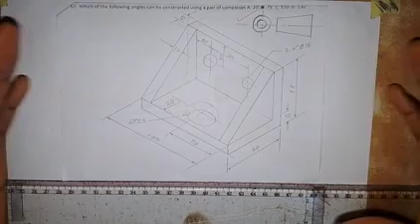Here we are going to draw the orthographic views of this object, as you can see on the screen.

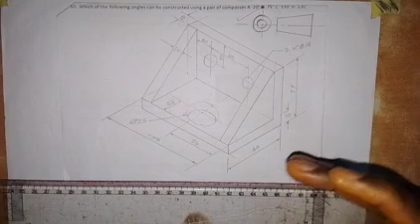The question says that we are just to produce the orthographic views. We are not told in writing whether we should produce the orthographic views in first angle projection or third angle projection, but symbolically we are to produce it in third angle projection because of this symbol that we are given. This is the symbol that we have in the drawing. So this symbol is for the third angle orthographic projection.

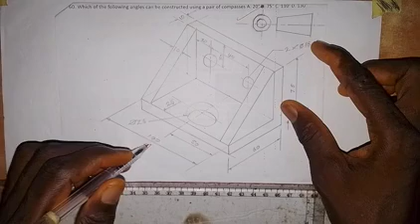When you see a symbol like this on a drawing, when it comes to orthographic views, you have to produce the views in third angle projection. That is what this symbol means. Okay, now for this object, the front elevation is in this direction, so we are looking at it in the direction of arrow X.

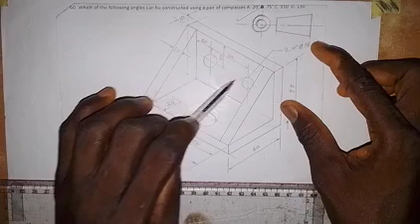So what are we going to see in this direction? We are going to see this rectangle, and within this rectangle we have a hole that is hidden. So let's take note of that. We see this rectangle, then we see this rectangle, then these holes are part of this rectangle here. So those are the things that we are going to put together for the front elevation.

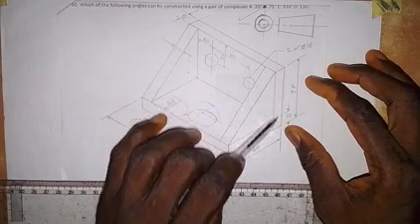For the plan, we are going to see this surface, this rectangle, this rectangle, this rectangle, and then this hole. For the end elevation, we have this shape with this triangle; this will be for the right end elevation. Then we have the same thing repeated on this side for the left end elevation.

But we are going to start with the plan, that is the top view. So we are going to draw this rectangle, this rectangle, this rectangle with this. In third angle projection, the plan is placed up and the front elevation is placed down. The left end elevation is placed on the left side of the front elevation, and the right end elevation on the right side of the front elevation. You are going to see how I'm going to work this out right now.

Let's start with the top view, which we are placing up here. The first thing is to draw a horizontal line. So I have this horizontal line going across the whole page. Then I'm going to come around here and draw a vertical line like this. Okay, then let's look at the dimensions.

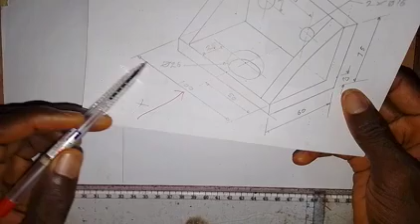The distance from here to here is 100. It applies to this rectangle also. So the length is 100. I will take a measurement of 100 millimeters. So this is 100 millimeters. Then I'm going to draw a vertical line here. So this is it.

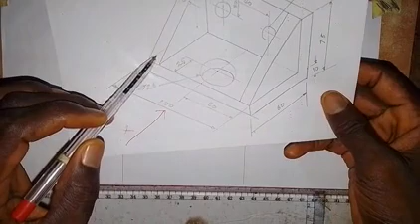Let's start like this. For us to draw this rectangle, the total length from here to here is 60 millimeters. So I will take a measurement of 60 millimeters, and I'm going to draw a horizontal line all through, because of the end elevation that we are going to draw.

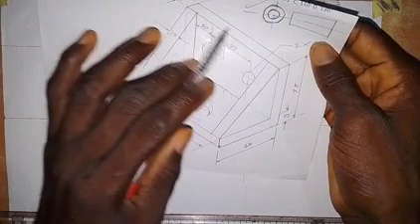Now let's draw this rectangle, the one we are starting with. The thickness is 10, so I'm going to take a measurement of 10 millimeters. Here I will draw a horizontal line across the whole page. So this is it.

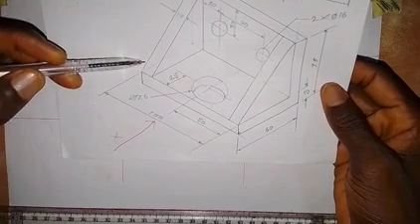We have drawn this rectangle, so we need to draw this rectangle. The thickness of this rectangle is 10. So from here I will take 10 millimeters. We also have another one on this side, so I will take another 10 millimeters. Then here, let me make it a thick line at once.

So that I will not be doing that again. So making this a thick line from here to here, and then I will also draw it as a thick line, so from here to here. So because of the front elevation, I will use my red pen to project this down, and also to take this down. Alright, so we have that.

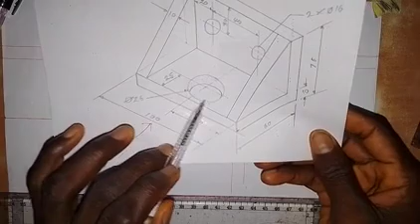So another thing that we are going to have here is this circle, and we are told that for us to get the center of this circle, it is 25 from this edge here. So where is this edge? It is here. So I'm going to take a measurement of 25 millimeters along the vertical. So this is 25 millimeters here. Then I'm going to draw a horizontal center line through the whole page. So it goes to the left side, and I'll also take it to the right side like this. Okay. Alright, so we have it like this.

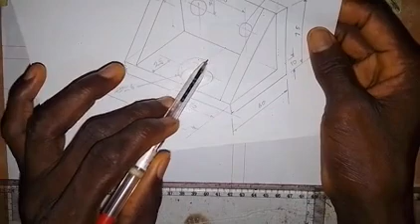So we are told that for us to get this center line, the center line of this circle, the hole, it is 50 millimeters from this end here. So I will take 50 millimeters from this end. So this is 50 millimeters here. So I'm going to draw the vertical center line, because we are still going to use that in the front elevation that we are going to draw down here. Alright, so we have this.

So for the circle, the diameter is 26. That means the radius is 13 millimeters. So I take a measurement of 13 millimeters. So this is 13 millimeters here. So putting the pin point here, then I will draw the circle. So it goes like this. Okay. Alright, so that is the circle.

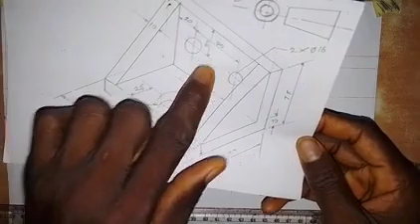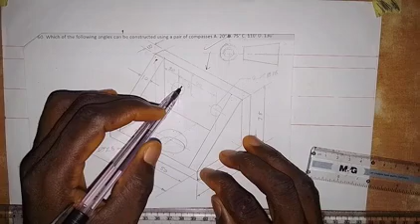So for the plan, what we are left with are these two circles here. We cannot see these two holes when we are looking at the object from the top down. They will be hidden from us on this surface, so they are within this part. So from this end to this center here is 20 millimeters. Same thing applies to this. From here to here is 20 millimeters. So the center lines of the two circles are 40 millimeters apart. And then the diameter of these two circles is 16, which means that the radius is 8.

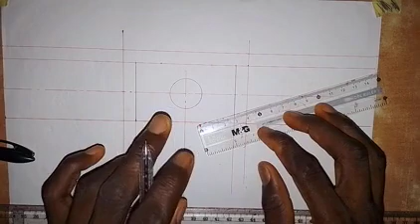So what we are going to do now is that from this end here, I'm going to take a measurement of 20 millimeters. So this is 20 millimeters. Then I will come here and take 20 millimeters from this end. So this is 20 millimeters. Okay. So I'm looking at that distance. Okay, yeah, so it's okay. So that is the center. So I'm going to draw a center line, and that center line I will also take down. So there it is. So draw a center line within this.

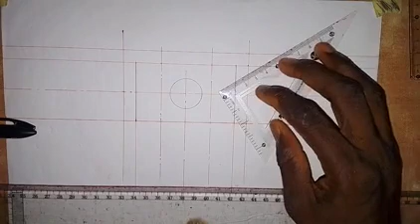So the center line is drawn with a long dash line. In technical drawing, we have different types of lines that we use, and each line is expected to be used appropriately. And that is what I'm putting into my work. So the diameter of the hole, as I said, is 16. So we take 8 millimeters to the left side, 8 millimeters to the right side to make it 16. So we do the same thing here: 8 millimeters to the left side, 8 millimeters to the right side to make it 16.

Then it will be hidden in the plan. So we make this with short dashes line. Okay, so we come to this also. So we also draw it as short dashes line. Alright, so the last one is this.

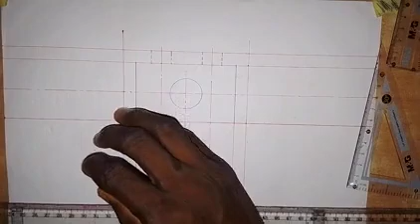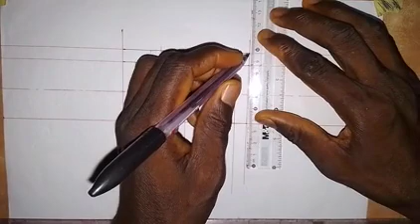Okay, so now let's complete the top view, that is the plan, by making this line a thick line, like this, from here to here. Then this line also we will make a thick line from here to here. Then we also make this line a thick line from here to here. Then make this line a thick line from here down, and make this also a thick line from here down. Okay, so this gives us the plan or the top view of this object.

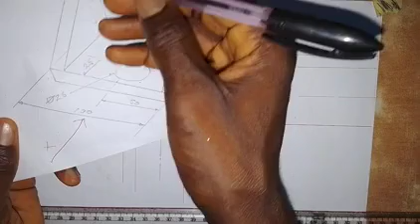Let's analyze what we have here. This rectangle is drawn here, and this rectangle we have within here. This rectangle here is here. Okay, so the hole or the circle is here, while these ones are hidden, they are within this part. So this is the top view or the plan of this object in third angle projection.